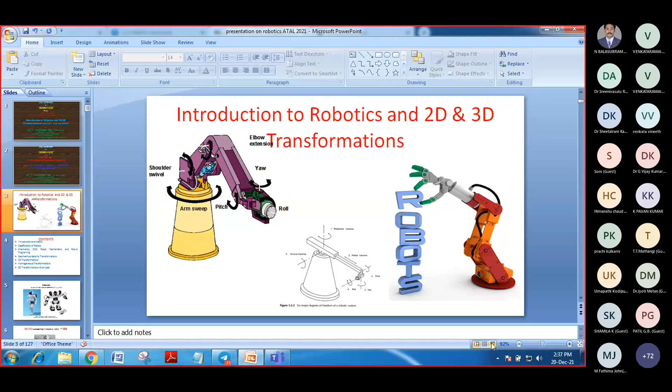My topic will be introduction to robotics and 2D and 3-dimensional transformations. Later I will focus a little on homogeneous transformation also, whatever it may be, 3 matrix or 4 matrix.

Introduction to robotics. This is a simple robot I am displaying here, which is called a simple 3-degree freedom robot. We have in this the shoulder swivel, and the 3 movements: yaw, pitch and roll movements.

This is elbow extension. This is shoulder swivel. This is arm sweep, and this is elbow extension, roll, pitch and roll. This is actually the 6 major degrees of freedom of a robotic system.

We have here rotational traverse. This is the first one, rotational traverse. Second is radial traverse. This movement, and third one is vertical traverse. We have these 3 linear motions, rotational motions, and another to the gripper: rolling, yawing, pitching.

That we will be discussing later, after the introduction. So my contents will be the introduction and history, then the classification of robots. Depending on what we have, different kinds of classifications for Japanese, German, Indian, American - depending on the country, we have different classifications.

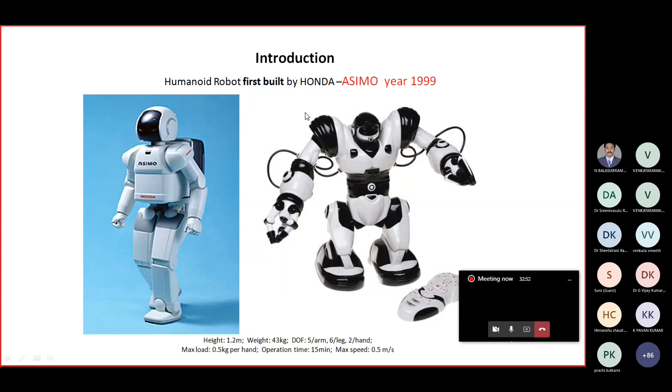The maximum speed can take up to 0.5 meter per second while walking. So this is with the least specification they made in 1999. The name given is ASIMO - ASIMO stands for Advanced Step in Innovative Mobility.

In 1999, it was first launched by Honda Corporation. It has recently celebrated the 22nd birth anniversary. The ASIMO robot made by Honda Corporation celebrated its first on 14/10/99. Now the 22nd birth anniversary was recently celebrated on 14/10/2021. So this is just a brief introduction.

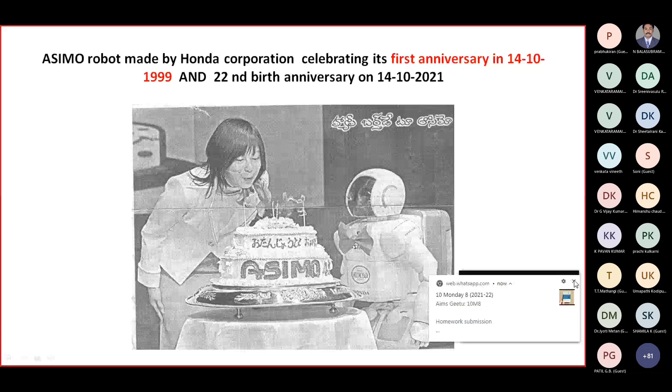Now we can define what is robot - how a manipulator or an industrial robot. You can consider it as an industrial robot or any working mechanical robot, composed of a series of links connected to each other via joints. Each joint usually has an actuator, a motor for example, connected to it, which transfers the energy from one joint to another joint.

A manipulator is composed of a series of links connected to each other via joints. Each joint usually has an actuator connected to it. Robot.

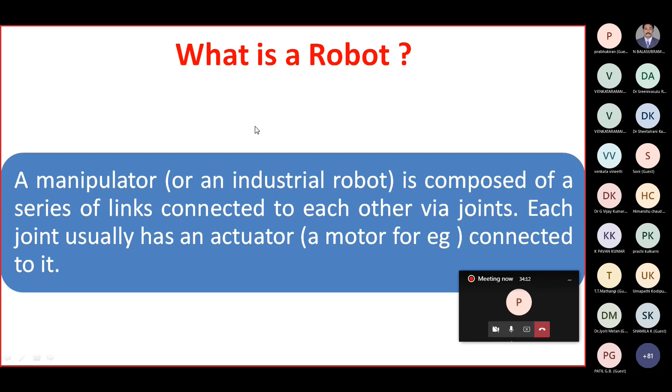Robotics is the art, knowledge base, and know-how of designing, applying, and using robots in human endeavors - how they can develop this kinematics and dynamics, how they can develop the degrees of freedom, how we can calculate the workspace, everything. So that study gives about the robotics.

Robotics is an interdisciplinary subject that benefits from mechanical engineering, electrical and electronics engineering, computer science, biology, and many other disciplines. So robotics is not only considered mechanical, it is concerned with other branches - it is interdisciplinary, you can say. They are about electrical connectivity, electronics, and this. They will be giving computer science - writing some logical programming for the robot - and biology and other many areas also we are using this.

Robot means forced labor, simply a worker. That's why the name was given. A robot is a reprogrammable multifunctional manipulator.

Robotics is a branch of technology which concerns the problems of robot design, development, and applications. In robotics, we study how to design robots, how to develop them with the help of degrees of freedom, and their applications.

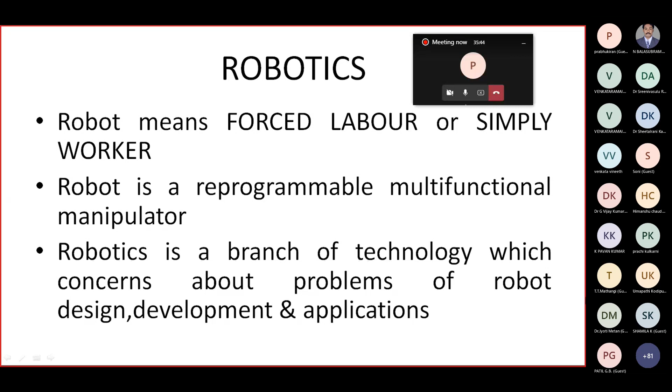Joseph F. Engelberger is known as the father of robotics. He invented the first robot in 1954. That's why we consider him the father of robotics.

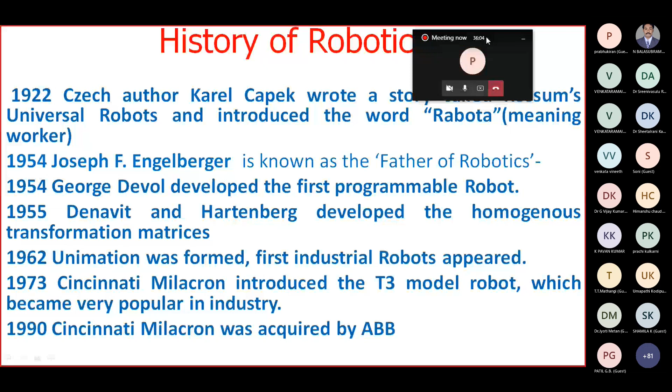Now for the history of robotics: in 1922, the Czech author Karel Čapek wrote a story called Rossum's Universal Robots and introduced the first use of the word robot, meaning worker, as already mentioned, forced labor. In 1954, Joseph Engelberger is known as the father of robotics.

He introduced the actual design and development of robotics, the applications, and how we can analyze robots. In 1954, George Devol developed the first reprogrammable robot using a programmable language.

In 1955, Denavit and Hartenberg developed the homogeneous transformation matrices. That's why we call them the DH transformation matrices, named after Denavit and Hartenberg who developed them.

In 1962, Unimation was formed and the first industrial robot appeared in the world. Later in 1973, Cincinnati Milacron emerged. This company produced not only robots but also CNC machines, milling machines, and turning machines. They introduced the T3 model robot, which became very popular in industry.

At that time there was big competition between CNC machines and robots. They introduced both the CNC and the T3 model robot in 1973. In 1990, Cincinnati Milacron was acquired by ABB, Asea Brown Boveri, which took over the company and developed more robots and transformers.

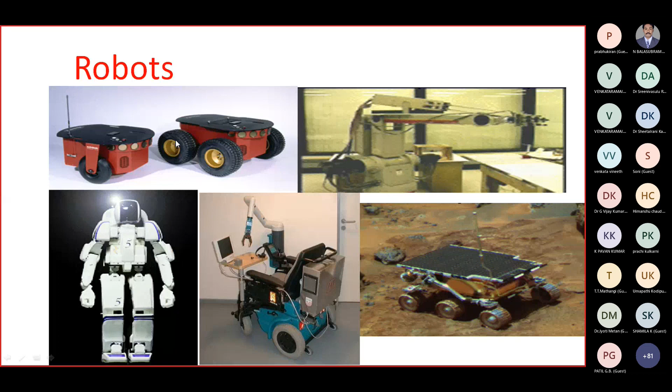There are different kinds of robots: wheeled robots, articulated robots, SCARA robots, and others used in different applications such as space, dental, medical, and military applications, including small robots used on battlefields to counter warships.

A robot is an automatically controlled, reprogrammable, multi-purpose manipulating machine with several reprogrammable axes. This is the short definition. Now we can move to the classification of robots.

The first classification is JIRA, the Japanese Industrial Robot Association. The second is RIA, the Robotics Institute of America. Then AFR stands for Association Française de Robotique, which is the French classification. Another one is SCARA, and Puma is there also.

SCARA stands for Selective Compliance Assembly Robot Arm. The first SCARA was developed by Mitsubishi Corporation, and JIRA was developed by the Japanese Industrial Robot Association. So we have different classifications: JIRA, RIA, AFR, SCARA, and Puma.

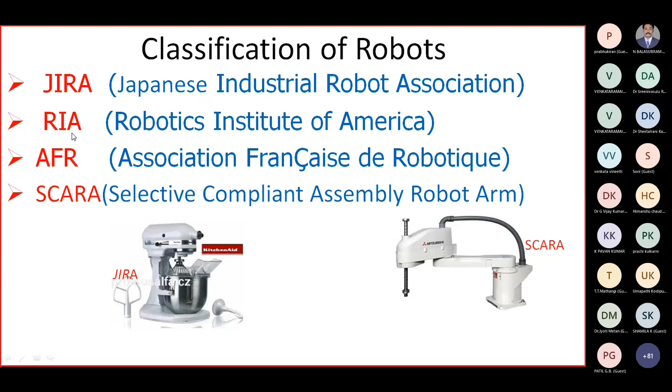Now for the types of robots. First is pick and place, which just moves items between two points, one place to another. These pick and place robots are used for shop floor operations such as mechanical material handling, equipment handling, and part handling systems.

Then a SCARA robot, Selective Compliant Articulated Robot Arm, is a pick and place robot arm with angular XYZ positioning, which we can see used in pick and place operations.

The second type is continuous path control, where it moves along a programmable path based on the program given along the X-axis, Y-axis, and Z-axis. An example is the 6-axis industrial robot developed by the Fanuc company.

But additional cost is often spent for tooling and programming. This is a totally 6-axis industrial robot with 3 joints and 3 links, giving us a total of 6 degrees of freedom. The third one is sensory robots.

Sensory robots employ sensors for feedback systems. The robot performs according to the sensor applications - what sensors we are using: pneumatic, hydraulic, mechanical sensor, or electrical, electronic sensors. Because of that, we can give motion to the particular robot.

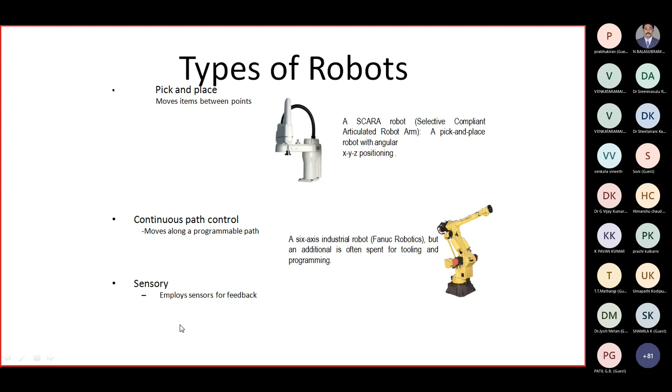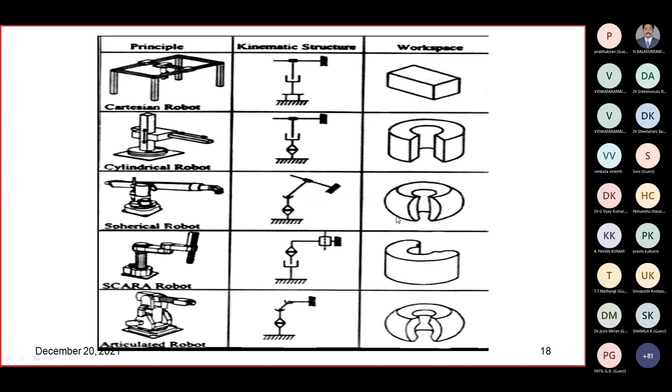Totally it is called 6 major degrees of a robot. Now we can go for some manipulator joints, how we can give translational motion, that is linear motion. One is orthogonal motion, orthogonal joint. Through the linear joint we can give linear motion, and through the orthogonal joint we can give orthogonal motion. Here we denote this translation motion. Linear joint is typed by L, and orthogonal means O, we denote that as O.

This is the input link, this is the output link, and this is the joint motion. We are giving joint motion to this. And for the orthogonal joint, we are giving the joint motion here. This is the input link, and this is the output link.

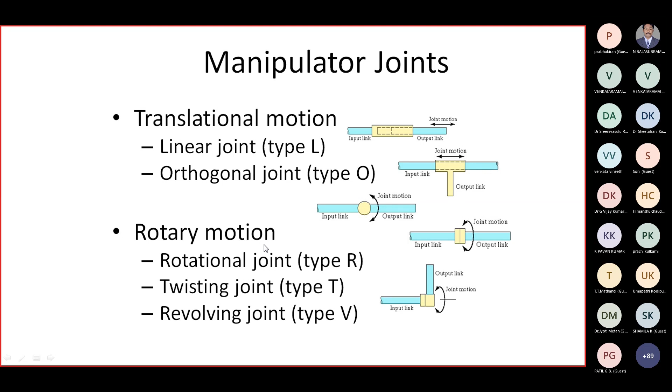Now the joint notation scheme uses the joint symbols L for linear, O for orthogonal, R for rotational, T for twisting, and V for revolving, to designate joint types used to construct a robot manipulator.

Here two terms are there: it separates body and arm assembly from wrist assembly using a colon. For example, TLR means twisting, linear, rotational for body and arm, then twisting, rotational for wrist. The wrist movement will be twisting as well as rotation, whereas the body and arm assembly has twisting, linear and rotational.

Commonly, there are various body and arm configurations. How we can denote this by joint notation, you can see. First one is polar coordinate, body and arm assembly.

This is moving in this direction. This is rotational, this is twisting, and this is the linear movement. So the notation is TRL. T stands for twisting, R is rotational, L is linear. So it consists of a sliding arm.

This is the sliding arm, L joint. This sliding arm is actuated relative to the body, which can rotate about both a vertical axis and a horizontal axis. This is the T joint, and the horizontal axis is R. One vertical axis we consider as Y, and one horizontal axis as X. So there are two rotational movements, T and R, twisting and rotational, and one linear. That's why in polar coordinate we give the notation TRL.

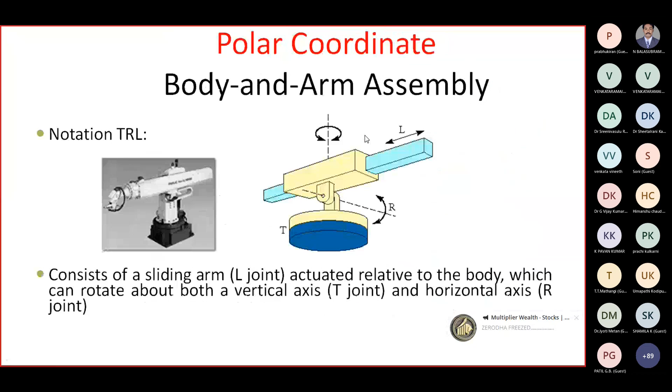Similarly, for Cartesian coordinate, the notation is LOO. You can see this L direction, these two joints are there, these two are orthogonal, one is orthogonal, one is orthogonal, then this is L.

It consists of 3 sliding joints. This is one sliding joint, another sliding joint, and this is the third sliding joint. The 3 sliding joints are there, and 2 of which are orthogonal.

These 2 are orthogonal, and one is linear. So both are orthogonal, meaning other names include rectilinear robot and XYZ robot. This is also called the rectilinear robot. The notation for this Cartesian coordinate is LOO.

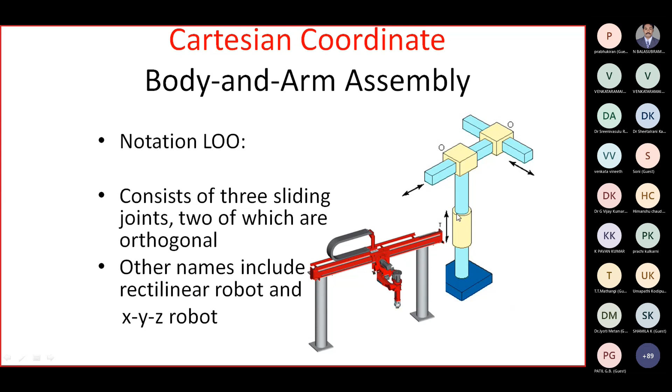So like this, we have four things. Polar coordinate system, that is TRL. Second one is cylindrical, we have TLO. The third one is Cartesian coordinate, LOO. And the jointed arm robot, TRR. Like this, four we have.

And the last one is SCARA. We can see this is the orthogonal movement we are giving, and this is the rotation movement. This is the movement V rotation.

This third one, SCARA, stands for selectively compliant assembly robot arm. Here, similar to jointed arm robot, except the vertical axes are used for the shoulder and elbow joints to be compliant in horizontal direction for vertical insertion task.

Like this we have R, V and O, that is VRO. So now the notation for SCARA is VRO.

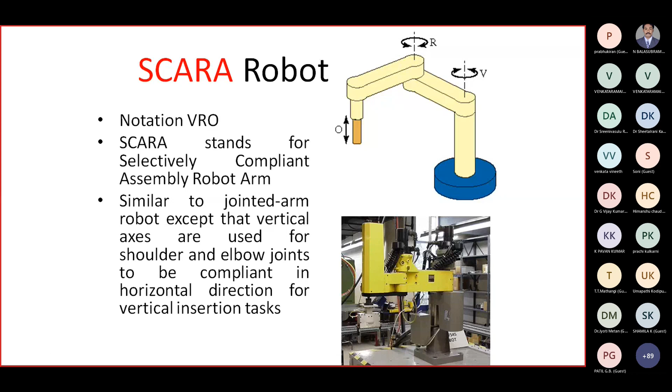Then the wrist configuration. So far we discussed about the body and arm. Now the wrist configuration also we have to see. In the wrist, how we can move the components, how we can rotate the wrist to pick and place the component from one place to another. The wrist assembly is attached to the end of the arm, and the end effector is attached to the wrist assembly. So we are attaching some end effectors to the wrist assembly so that we can pick the components by using the end effectors. The function of the wrist assembly is to orient the end effector.

So body and arm determines the global position of the end effector, then the 2 or 3 degrees of freedom - that is the roll, the pitch, and the yaw. These are the 3 movements, one in this direction, one in this direction, one in this direction. Then these are the RRT - the rotation for the wrist configuration is RRT, that is rotation, rotation, twisting.

Now joint drive systems. We can use some joint drive systems by using electric, hydraulic, and pneumatic applications. So for joint drive systems, we use pneumatic, hydraulic, and electrical systems. Electric uses electric motors to actuate individual joints. This is the preferred drive system for today's robots.

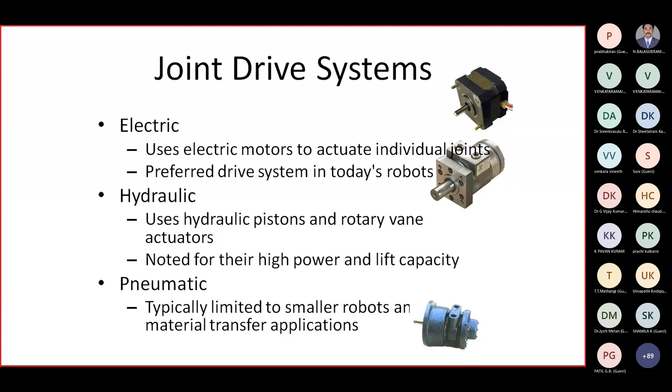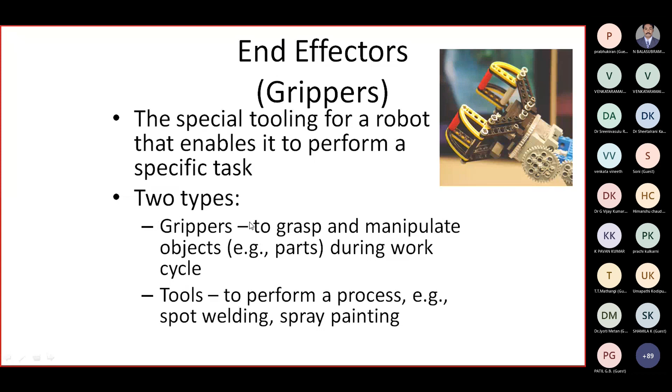by using pneumatic applications. Now the end effectors - you can see these are the grippers. So for the end effectors, we are giving these grippers to hold the component. This is special tooling for a robot that enables it to perform a specific task. Two types: grippers to grasp and manipulate objects during the work cycle, and tools also we use sometimes to perform a process, like spot welding, spray painting, and arc welding. So for this kind of welding purpose, we are using some tools here. So two types of end effectors we can use: grippers as well as tools.

Grippers, you can see grippers and tools. These are the kinds of various tools and grippers we are using for holding the component for the robot and end effectors.

Now the robot control systems. We have limited sequence control, playback with point-to-point control, playback with continuous path control, and the last one is intelligent control.

In limited sequence control, we have pick and place operations using mechanical stops to set positions. The second is playback with point-to-point control, where it records work cycle as a sequence of points, such as X, Y, Z points, then plays back the sequence during program execution, controlling how the points move in X, Y, Z directions.

The next one is playback with continuous path control. In point-to-point control, it moves from X to Y, Y to Z, Z to X. But in continuous path control, we have greater memory capacity and more interpolation capability to execute paths in addition to points. We give the paths also, not just points, specifying how much movement in the x, y, and z directions.

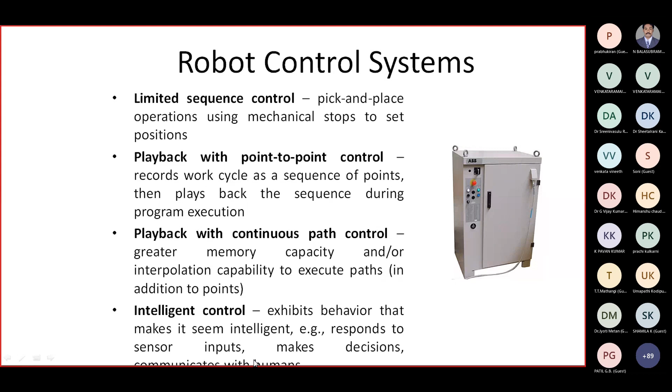Now the next topic is what kind of sensors we are using in robots, such as position sensors, range sensors, velocity sensors, and proximity sensors.

The first is position sensor. It monitors the location of joints, then coordinate information is fed back to the controller. This communication gives the system the capability of locating the end effector, which is the part that usually performs the task. After giving this location to the end effector, it further performs the task.

The range sensor measures the distance between a point on the robot and a point of interest that surrounds the robot. This task is usually performed by television cameras or sonar transmitters and receivers. If the sonar or camera misses a point, undesired coincidences may occur, which is why we sometimes use transmitters and receivers together.

Velocity sensors estimate the speed of a moving manipulator. Due to effects caused by mechanical force, gravity, and weight of load, the workspace load, desired speed, and required force to reach that speed should be computed continuously using these velocity sensors.

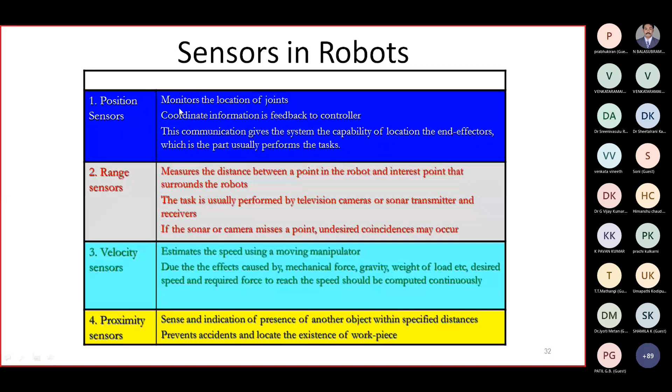The last one is proximity sensors. These sense and indicate the presence of another object within specified distances, which prevents accidents and locates the existence of the workpiece exactly, including the coordinate system on the robot. So these are the sensors in robots: position sensors, range sensors, velocity sensors, and proximity sensors.

Then what are the parts of a robot? There are five main parts: manipulator, pedestal, controller, end effector, and power source. Let's see how this is correlated with the human body.

The manipulator has a simple base and appendages, then the shoulder, the arm, and the grippers. Altogether, this is called the manipulator, meaning it is the full robot, consisting of base, appendages, shoulder, arm, and grippers.

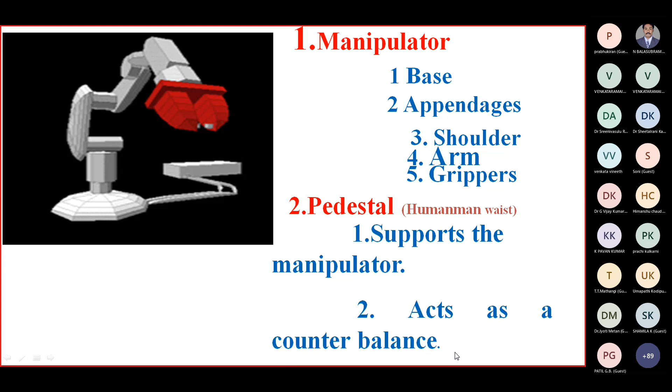Second is the pedestal, which is like the human waist. It supports the manipulator by giving some energy, supporting it and acting as a counterbalance.

The third is the controller, which acts like the brain of the human body. It is comparable to the controller of the robot, issuing instructions to the robot, controlling peripheral devices, and interfacing with both the robot and humans.

The end effector is like the hand. Everything that can be done by a hand can be done by the robot's end effector, such as spray paint attachments and welding attachments, including spot welding and various other welding attachments.

Then vacuum heads, then hands. So these are all the end effectors. The last one is power source, meaning the energy - how it is getting energy, how it is getting power. Similar to how humans get energy from food, the power source gives energy to the robot, which may be electric or pneumatic. So we have the five main things: manipulator, pedestal, controller, end effector, and power source.

Then arm and body motions - what kind of motions can we give to the robot? That is vertical traverse, which is up and down movement of the arm caused by pivoting the entire arm about a horizontal axis or moving the arm along a vertical slide. So we can give these motions.

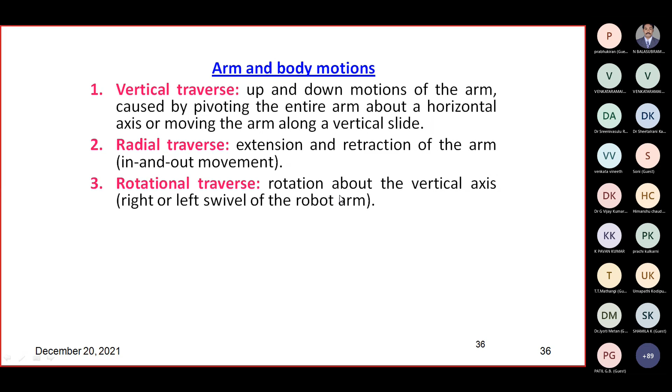And revolving also we can give. The fourth one is revolving, also we can give the rotation.

And the wrist motions - already we know wrist motions: wrist swivel, wrist pitch, and wrist yaw. Swivel means rotation of the wrist. Wrist bend means up and down movement of the wrist, which also involves a rotation movement - this is called pitching movement.

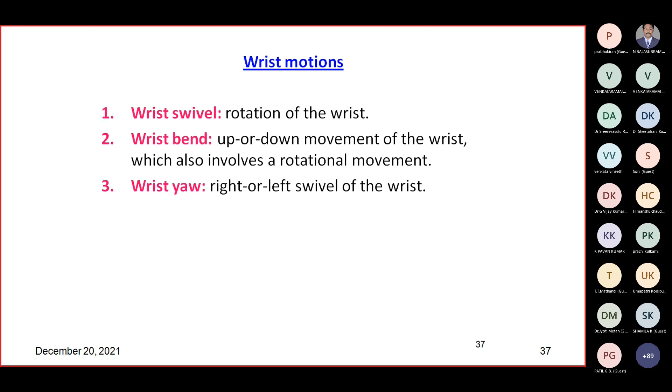Then wrist yaw means right or left swivel of the wrist, that is left and right, that is panning movement - this is called yaw movement of the wrist. So like this, we can give the wrist motion as a technical feature of the robot.

If you want to buy any kind of manufacturing robot with particular specifications, we have to look at all these important technical features mentioned below, starting with work volume.

What do you mean by work volume? Work volume means the movement of the robot in a particular area - that is work volume, work space. Then precision of movement - how precisely it is moving in the X, Y, and Z directions.

Using pneumatic, hydraulic, and electric power energy. Then speed of movement - how fast it is moving, whether low speed, high speed, or intermittent speed. Weight carrying capacity - how much weight the robot can hold. Then type of drive system - whether it is electrical, pneumatic, electronic, or hydraulic.

By looking at all these technical features, we can make a better decision when purchasing a robot. Now let's discuss them one by one.

What is work volume? Work volume refers to the space within which a robot can operate - it may be rectangular space, cylindrical, triangular, or linear. It refers to the space within which the robot can operate.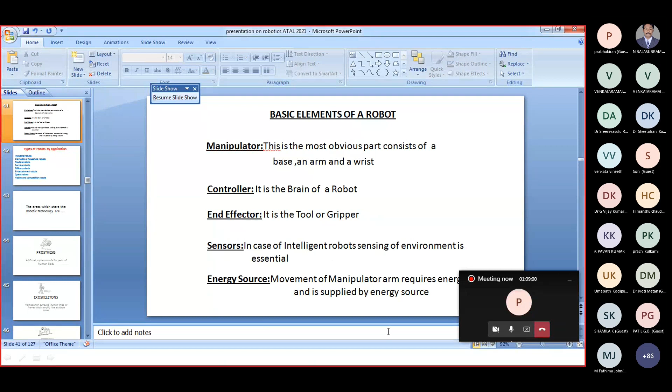In the human hand, the arrangement of bones and joints provides dexterity. Each joint represents degrees of freedom. There are 22 joints here, and thus 22 degrees of freedom in the human hand.

The degrees of freedom will be 22 here. Counting through the joints - first, second, third, up through 22 - we get 22 degrees of freedom for 27 bones.

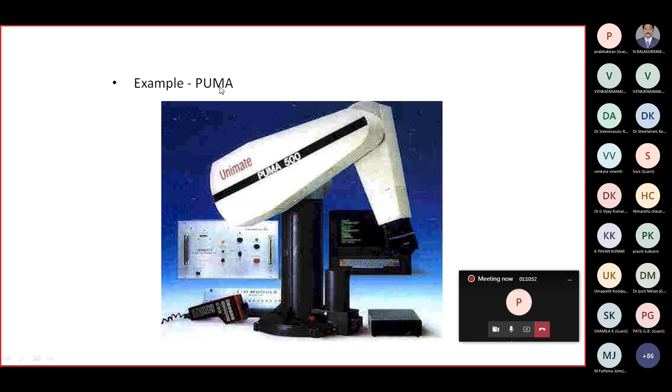This is one kind of robot called Puma - Programmable Universal Machine for Assembly is its name. And examples include the Stanford arm.

Guide robots can be sent into the army battlefield to safeguard the soldiers and army officers.

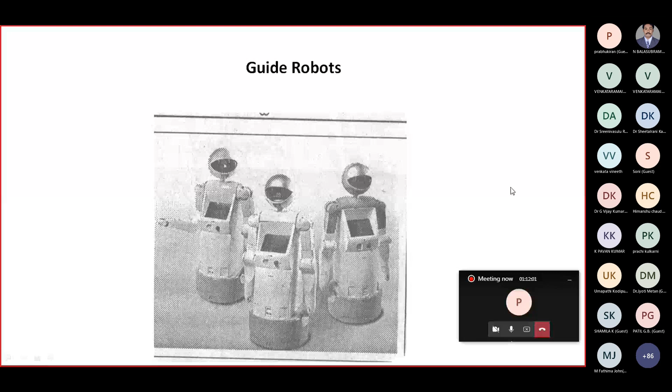So we are sending in the robot in the battlefield to safeguard. Guide robot, these are the robots. We can see some applications.

This Asimo, this is the articulated. This is applications of different manipulators. This is by using all these various applications.

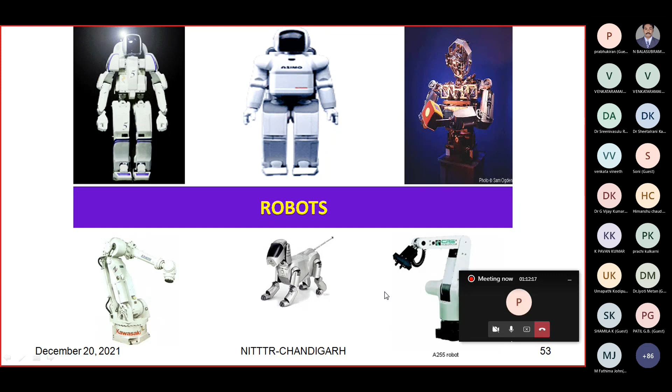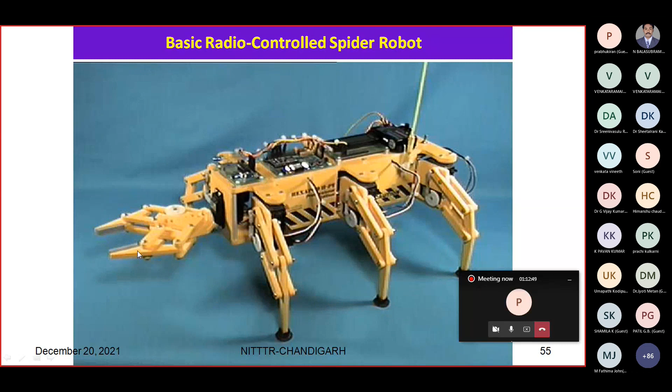Basic radio controlled spider robot - since it has a spider shape, it is called spider robot. We have three legs here and three legs again there. These grippers are used to hold devices, and the spider has a camera, which we keep mounted on it. So this is the six-legged spider robot.

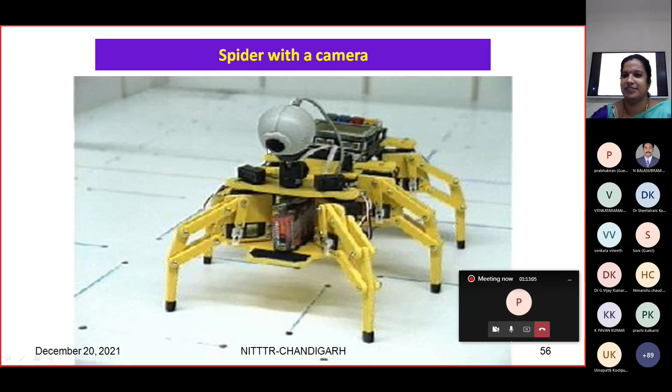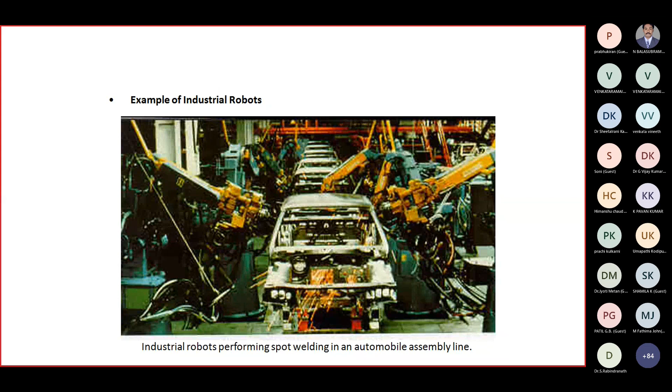That's why humans are being replaced by these robots nowadays, to get high accuracy and high performance of the products. Now we can see this being done in the automobile trim line section, using this kind of robot to perform the task.

Simply, the output of this CMM robot is to generate geometrical points. After getting the geometrical and coordinate points, we can make a model of that component and go for machining. So this is like a reverse engineering process - first generating control points, then modeling through surface modeling and solid modeling, then getting the final product through machining to get a finished product. So we are using some robot type CMM machines also.

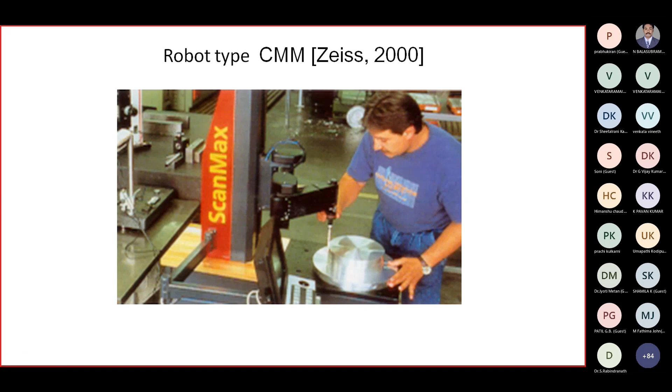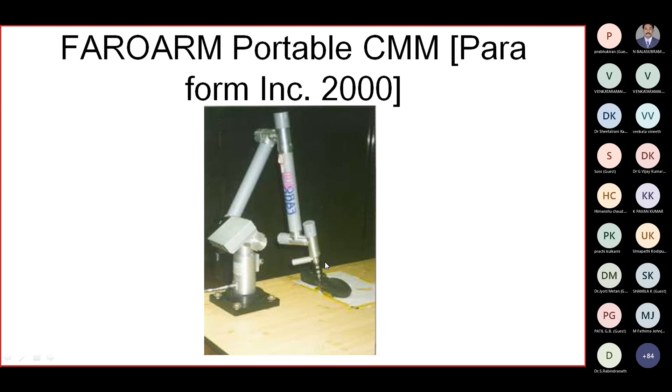Then the Faro arm, a portable CMM - this is a portable Faro arm. These are handy; we can take them to a vendor site. With the help of this portable CMM we can measure the component size, dimensions, everything at the vendor site. These are tiny to handle, small enough to take anywhere on the industry side, any vendor site. With the help of the CMM we can find out the geometry of a particular component. So we also have small portable CMMs.

We also have gantry type robots. Gantry type means very big size robots.

So these are the types of robots by locomotion and kinematics. We can have stationary robots, wheeled robots, and legged robots. So far we discussed the stationary robots and wheeled robots. Now we can discuss the legged robots also, including this slide.

In stationary robots, that includes robotic arms with a global axis of movement, that is Cartesian gantry robots. Cartesian gantry means very big size robots. Those are all used to get the geometry pointers of heavy vehicles, that is automobile vehicles and automobile trucks. We can get the dimensions by using the CMM.

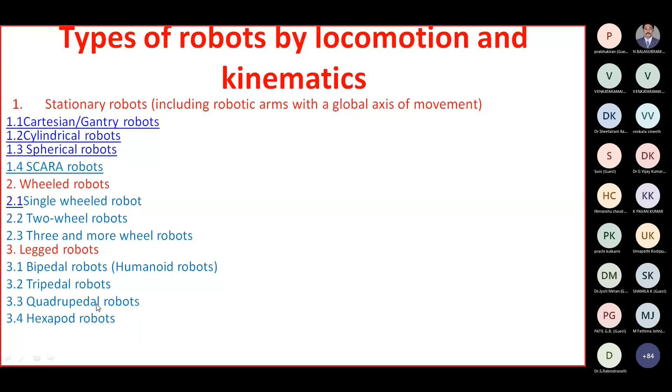So this is a simple structure of 6 major degrees of freedom of a robotic system. There is rotational traverse, vertical traverse, and radial traverse, and other three rotation moments, that is roll, yaw, and pitch. Okay, totally 1, 2, 3, then 4, 5, 6 - totally 6 degrees of freedom.

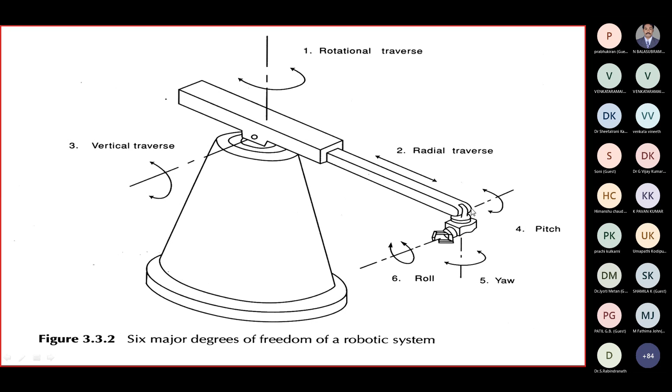Here this is the radial, giving the radial moment, linear moment, whereas these two give rotational and translational moments. Here these three, at least we have pitch, yaw, and roll. Other three things are rolling only.

In the classification, we can see the arm geometry. Depending on the arm geometry, we can consider rectangle. Arm geometry means again your workspace, how this robot can reach maximum area to pick and place the component. That is the rectangular space, cylindrical, spherical jointed arm, then jointed arm horizontal.

Then next comes the degrees of freedom, that is robot arm, robot wrist. We have two kinds: arm and body, and the wrist. So totally we have 6 degrees of freedom. In a simple articulated robot, we have 6 degrees of freedom, that is robot arm and robot wrist.

Power sources, again it is electrical. The power may be electrical energy, may use pneumatic energy and hydraulic energy to operate this robot simply. We have different kinds of power sources.

Then type of motion, that is slew motion, joint interpolation, straight line interpolation, circular interpolation. So slew motion, jointed interpolation motion, straight line interpolation, circular interpolation. Then it gives the path motion only, type of motion, that is point to point.

The next is path control. How we can give the path control, that is limited sequence, point to point, continuous path, controlled path. So four kinds of path control: limited sequence moves up to a limited area only, point to point moves from X to Y, Y to Z, Z to X, continuous path gives linear movement, and controlled path also.

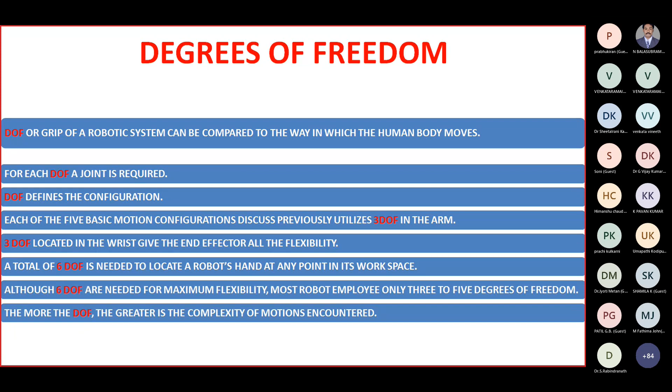So the motion will be, the fabrication time will be taking place. The 3 DOF located in the arm of a robotic system are then rotational traverse, that is the movement of the arm assembly about a rotary axis, such as the left hand, right hand, swivel of the robot's arm about a base.

Then the radial traverse is the extension and retraction of the arm, an in and out motion related to the base motion. The last one is the vertical traverse, which provides the up and down motion of the robotic arm. That is called linear or orthogonal motion.

That's the 3 degrees of freedom located in the wrist, which bear the names of aeronautical terms, that is pitch or bend, then yaw, roll or swivel. The pitch is also called bend and roll is also called swivel. You can see the three different degrees of freedom.

It is the up and down movement of the wrist, like this. Then yaw is the right and left movement of the wrist. Then roll or swivel is the rotation of the hand, moving either clockwise or anti-clockwise direction. So like this, 3 degrees of freedom we can define.

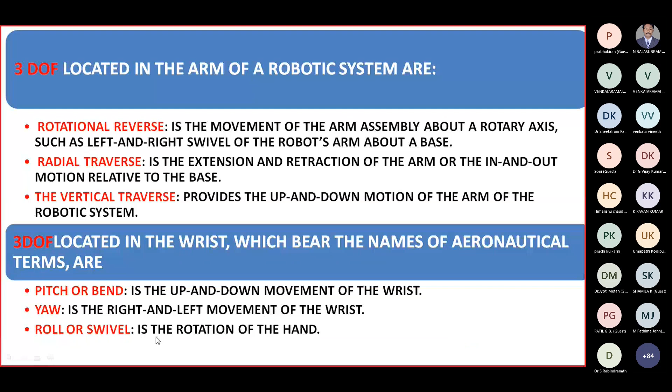So pitch or bend is the up and down movement of the wrist. Then there's the right and left movement of the wrist. Then roll or swivel is the rotation of the hand. Now the robot programming.

Robot programming is typically performed using one of the following methods: online programming, which includes teach pendant and lead through programming. Teach pendant means we have like a remote, similar to how we perform television functions. We have the teach pendant, which controls as a remote and performs the movement of the robot. The lead through program is also there in online programming.

Offline programming, we have different robot programming languages. Then task level programming - what is the task we are giving to the end effector, what is the task we are giving to the manipulator, all these things. These are the programming methods, offline and online.

If you are considering the offline program, it involves writing a program using a text-based robot programming language. This means you have to write in text form, and it does not need access to the robot until its final testing and implementation is required.

In online programming methods, you use the robot to generate the program, teaching and guiding the robot through a sequence of motions that can then be executed repeatedly. Often, programming is a combination of online and offline - online to teach locations in space, and offline to define the task or sequence of operations.

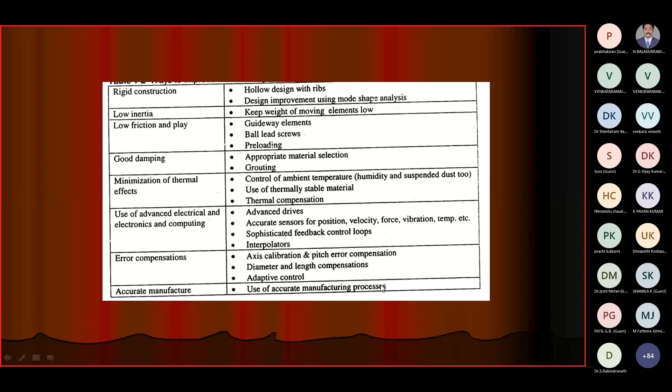How we have the axis formation, how we have different kinds of axis here, and rigid construction - we have low inertia, low friction and play, good damping, minimization of thermal effects, use of advanced electrical and electronics and computing, then error compensation. Here error compensation includes axis calibration and pitch error compensations, diameter and length compensations, adaptive control. Then accurate manufacturing, using accurate manufacturing processes.

Depending on the component dimensions, we can assign the machine, whether a CNC milling machine or CNC turning machine. If it is a flat component, we go for CNC milling. If it is a cylindrical component or workpiece, we go for the CNC lathe machine.

Then we set up the manufacturing database. Setting up the manufacturing database means we have to give the numerical control operations, set of operations, and numerical control sequences, like pocketing, end milling, profiling, knurling, turning, threading, all these things.

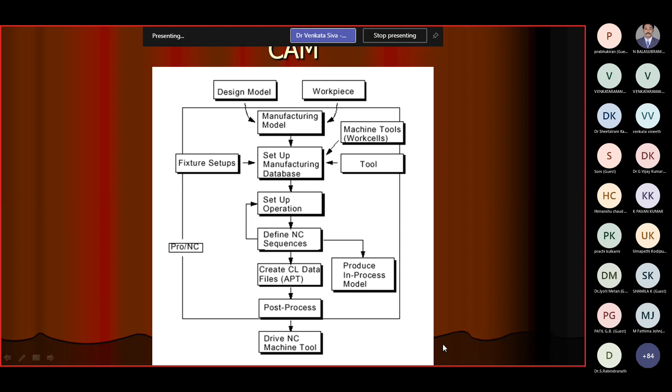Similarly, we can discuss robot machining and how we can view that. Now we can discuss transformations — so far we've covered how we can generate the transformation. Computer graphics and transformations are required for this.

The objective is to convert vector straight lines into raster images to be displayed on the raster terminal, utilizing pixel information. The CRT, cathode ray tube, is the monitor, and we use these images on the raster scan — that's why it's called a raster scan CRT.

Earlier, TVs used CRT tubes, which were very lengthy in size. That's why those TVs were very heavy and the technology was old. Nowadays we have LCD — liquid crystal display — LED, plasma, and OLED.

We have these kinds of screens nowadays to show images on the screen and understand the problems associated with displaying vectorial information on the raster terminal.

Different types of geometric transformations are used during CAD geometry generation and display, along with their evaluation. Then there is the mathematics required to display a 3D image on a 2D screen of the display.

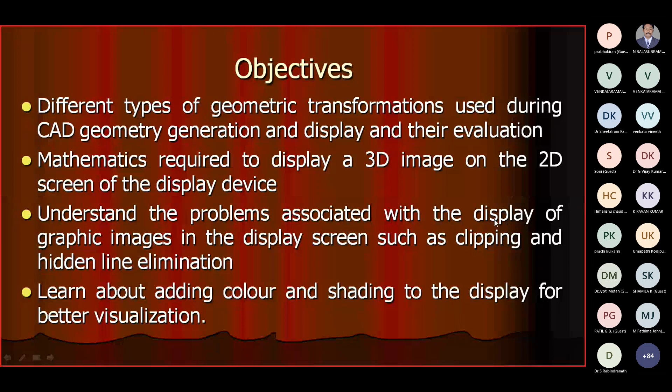The coordinate systems are the right-hand coordinate system, the right-handed cartesian system.

Sudhakar sir, your voice is not coming through. Please kindly unmute, sir. Sudhakar sir? Yeah, now it is okay. Hello, yeah, okay sir, is everything fine? Right, thank you. Just one minute.

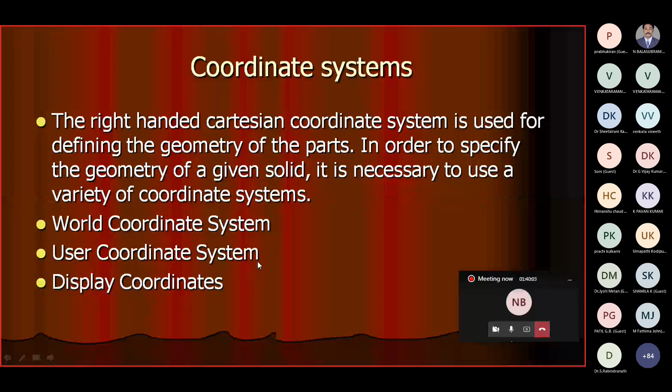These are the coordinate systems we have: world coordinate system, user coordinate system, and display coordinate system, which help for these transformations and all these things.

You can see this is a simple component to be modeled. This is the isometric view of the component, showing how we can represent scaling, translation, and rotation.

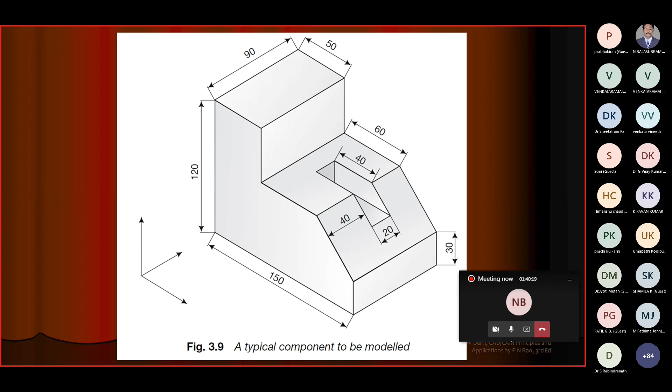World coordinate system refers to the actual coordinate system used as master for the component. Sometimes it may also be called the model coordinate system. Here you can see the typical component associated with the WCS, world coordinate system. It is actually the surface with X, Y, Z levels. Through this system we are generating points at level X, Y, Z, like 000, 001, 003. We are doing all these things.

That is WCS. The second one is user coordinate system. Sometimes it becomes difficult to define certain geometries if they are to be defined from the world coordinate system - sometimes it is not possible with WCS. In that case we use the user coordinate system. An alternate coordinate system can be defined related to the WCS. These are termed user coordinate systems, shortly called UCS, also known as working coordinate systems.

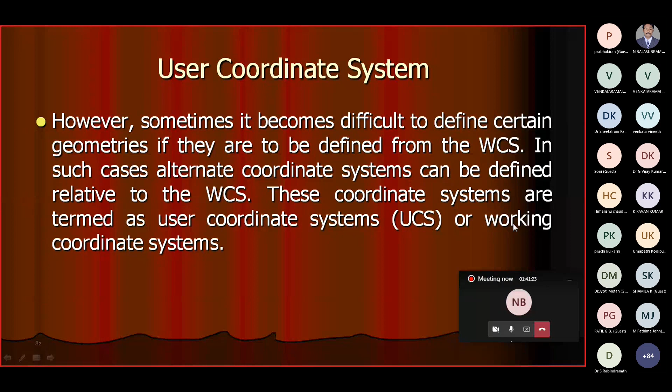Display coordinate system refers to the actual coordinates used for displaying the image on the screen. Here, display coordinates can use WCS as well as UCS.

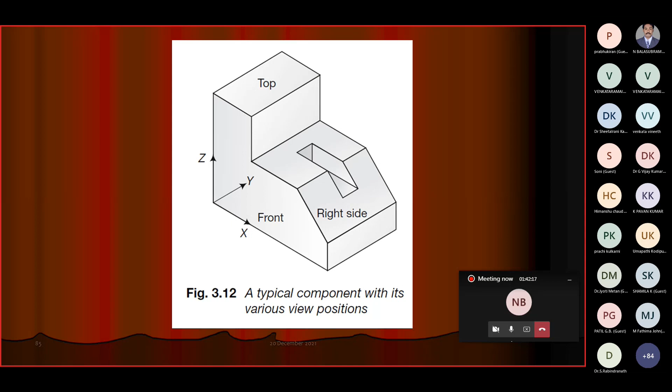You can see here we can represent the typical component with its various view positions. Front position, top position, right side position - this is called the view position system, display positions. You can see the front view, top view, side view, left side view, and right side view, all four views.

The geometric model data - most geometric modelers use a combination of random and sequential form data storage. You can see the data structure of geometric models like this, in isometric projection. We can represent the surfaces, the vertices, and the edges. An edge is defined by two vertices, and with the help of edges we can define the surface. With the help of surface, vertex, and edge we can define the total solid. So all together, we can define a solid.

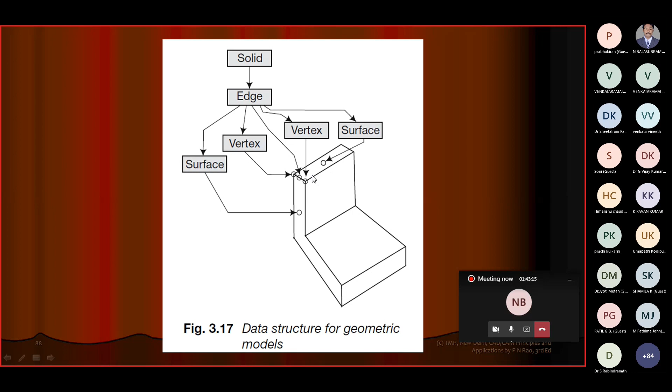The complete data structure for geometric models of products are vertices, edges, faces. Then you can generate a solid body, then single parts. If you want to go for the assembly, you can assemble all the single parts using attributes - that is intersection, union, and subtraction. Like in Boolean operations, we use subtraction, addition, intersection for assembly. By using commands like insert, mate, align, orient, we can assemble these components and finally develop a product. So this is the total data structure when generating from scratch.

This data structure helps with the transformations. Now we can see the transformations - scaling a triangle. The transformations are scaling, rotational, translational, and concatenated transformations.

If we see the scaling of a triangle, the first point is A, 4,0 - it is having 4 units in x direction and 0 in y direction. The second point B is having 1 unit in x direction and 2 units in y direction. The last point C is having 3 units in x direction and 5 units in y direction. Suppose I want to double the scaling of this triangle, what will be my new coordinates? We have 1,2; 4,0; 3,5. If I multiply these by 2, I get a new point, 2,4.

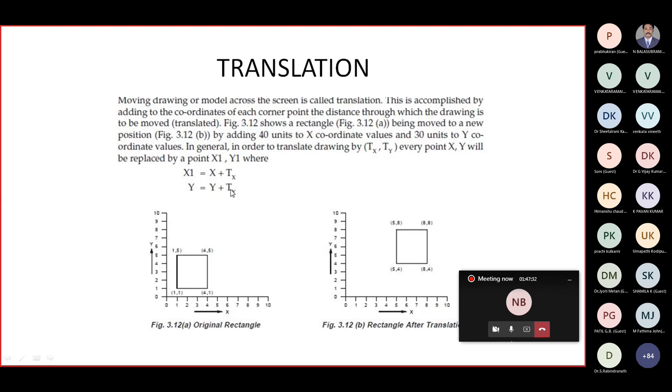So this is the rectangle after translation in x and y direction - in x direction I am moving 40 units, in y direction 30 units. The equations for translation are: x1 equals x plus tx, y1 equals y plus ty. tx means the translation in the x direction, and ty means the translation in the y direction. So this is about the translation.

Next is rotation. The rotation matrix is cos theta, sin theta, minus sin theta, cos theta. This is the 2 by 2 matrix.

Suppose I want to rotate about 45 degrees. Theta is 45. I am giving the displacement point 40, 20, meaning in x direction it has 40 units as the initial point, and in y direction it has 20 units. So here it is 4, here it is 2. This first point is P1. After rotation about 45 degrees, what will be my new point? That is P1 to P2, the new point. So here in x direction I have 40, in y direction I have 20.

If theta equals 45 degrees, I replace theta with 45 degrees: cos 45, sin 45, minus sin 45, cos 45. Cos 45 is 0.707, these are all the values. Multiply this by the 40, 20 matrix and you get the new coordinates, 14.14, 42.42. This is the newly generated rotation point. From x direction it is 14.14, and for y direction it is 42.42. So the angle is 45 degrees.

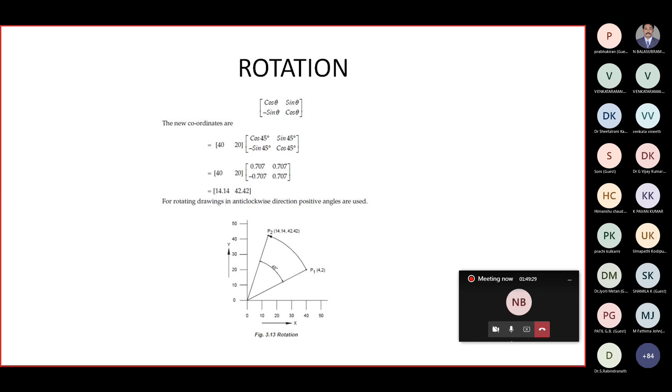You can have scaling, rotation, and translation. Another one is shear. Shear means movement in x direction and y direction.

Similarly, you can take the shearing along the x plane; this is the movement in the y direction, so the shear is along the y direction. The initial points are A, B, C, D, E. This is the original shape along the x-axis and y-axis. Now I want to change the shear along the y-axis, giving new points A1, B1, C1, D1, E1. This is after shear along the y-axis, the y shear. These are the new points.

Suppose I want to shear in the x-axis. My original shape will be A, B, C, D, E, shown with a dotted line. Shearing along the x-axis gives new points A1, B1, C1, D1, E1. This is after x shear. Since it is moving in x direction, it is called x shear; since it is moving in y direction, it is called y shear.

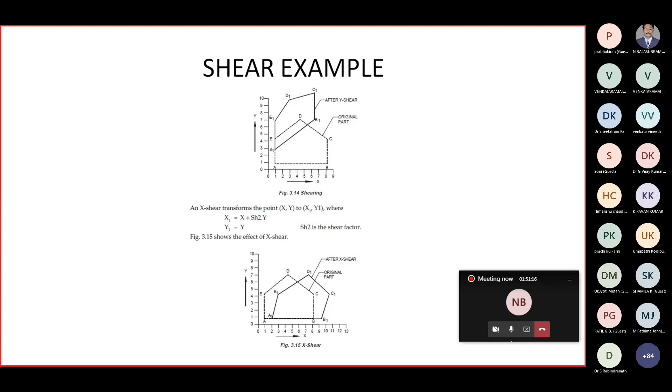So like this, we can give shear movement also for transformations. Transformation means displaying your image on the screen using scaling, rotation, translation, and shearing operations. That's why these transformations are very important in the display lesson.

Now we can see the homogeneous transformations. There are three homogeneous transformations. First, the translation case: x1, y1, 1 are the new coordinates, derived from xy1. The 3 by 3 matrix for translation is: 1 0 0, 0 1 0, tx ty 1 — meaning translation in x direction and translation in y direction. This is the full matrix for the homogeneous transformation for translation.

Similarly, for rotation, we have x1, y1, 1 from xy1, using the matrix cos theta, sin theta, minus sin theta, cos theta, with the remaining entries 0, 0, 0, 0, 1. This is the rotation matrix for the rotation axis. Similarly, for scaling: xy1 transforms using sx 0 0, 0 sy 0, 0 0 1.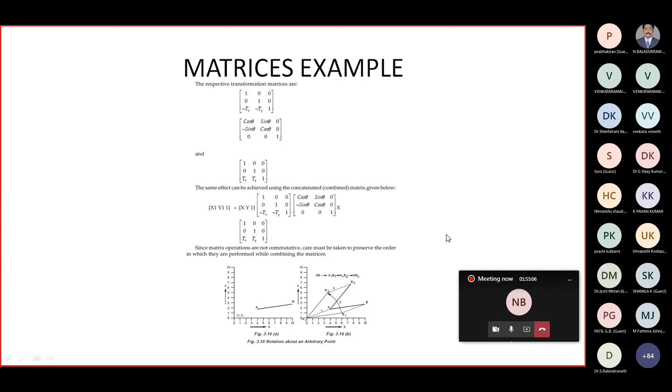So you can see here the AB value is there. I am having 4, and Y we have 3. This is the value. And before concatenated, after concatenated I have this one - that is, this is moving from this direction to this, this 0 2, and before this one - that is called the concatenated matrix. Here it is taking place: translation, rotational, scaling, all these things.

Now, after homogeneous transformation, we can discuss the 3D transformation. In homogeneous transformation, we have the 3 by 3 matrix, whereas in the 3D transformation, we have the 4 by 4. One axis will be extra here - that is 0 0 1 0, 0 0 1 will be extra here. It is often necessary to display the object in 3D on the graphic screen using the transformations. The transform matrix developed for 2D matrices can be extended to 3D here.

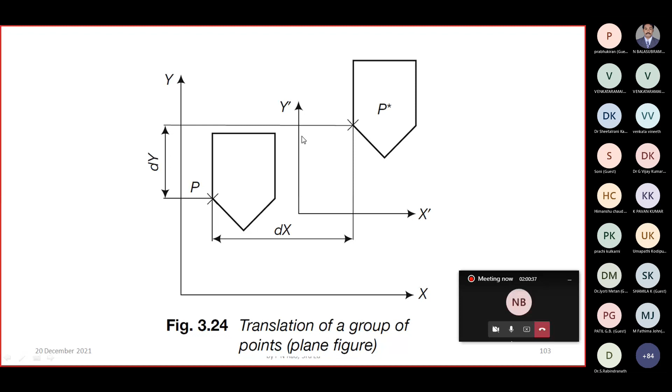You can see the translation of a group of points, a plane. You can see the initial point will be like this. After moving in the dx direction, I am just shifting to this one, P star. For this point, this is the x, this is the y. For this point, the x and y will be x dash, y dash. So dx is the movement about distance, plane figure.

sx, xy. Now scaling of a plane figure, you can see this is the initial figure, I'm having P point, about sx distance, about sy distance. Now I am moving this about sx distance, sy distance. The new scaling element will be like this. This is the doubled scaling of a plane figure, double scaling you can say.

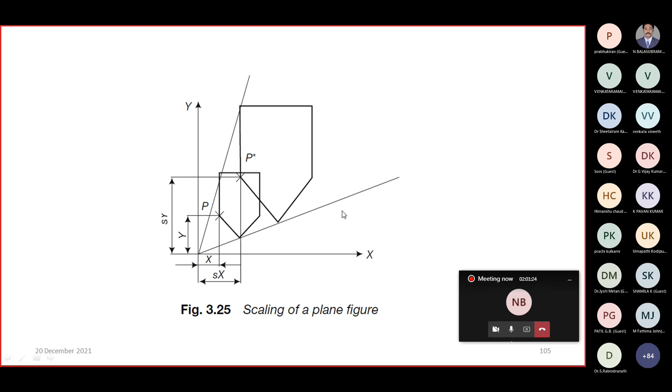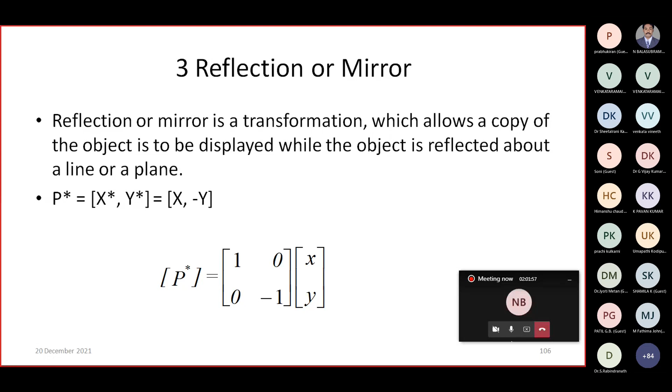Then the third one is reflection or mirror. Reflection or mirror is a transformation which allows a copy of the object to be displayed while the object is reflected about a line or a plane. Here you can see P, 1 0 0 minus 1, x and y. So here the reflection matrix is 1 0 0 minus 1, and x. Suppose if you want to reflect along the x axis, give the same values about x; about the y axis give the value about y. So this is the notational representation of the reflection matrix.

An example of reflection transformation you can see. This is the initial element in the y direction. Suppose I want to reflect in this direction, that will be minus y. So this will be my reflected point.

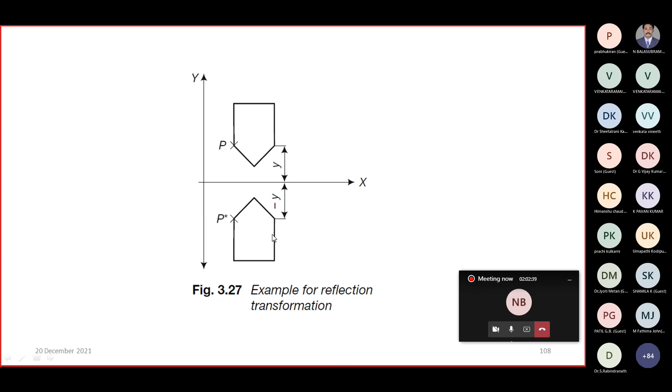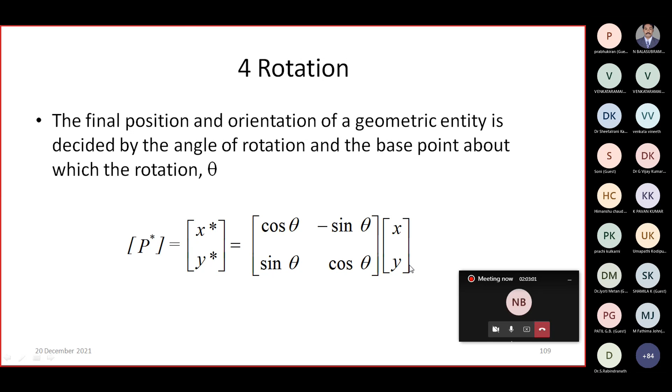Last one is rotation. Rotation is the final position and orientation of a geometry entity decided with the angle of rotation and the base point about which the rotation theta occurs. X, y, that is cos theta, minus sin theta, sin theta, cos theta, and the direction which rotation you want, that is y direction. This is the matrix representation for the rotational transformation.

This is some example if you want to solve, but since we don't have the time, we'll skip solving this one.

Concatenation of matrices is a multiple transformation, that is Tn, Tn minus 1, Tn minus 2, T3 translation, T2, T1 like this. If you multiply all the matrices, you will get the concatenation of transformation. The concatenation is the product of scaling, translation, rotation, and shearing.

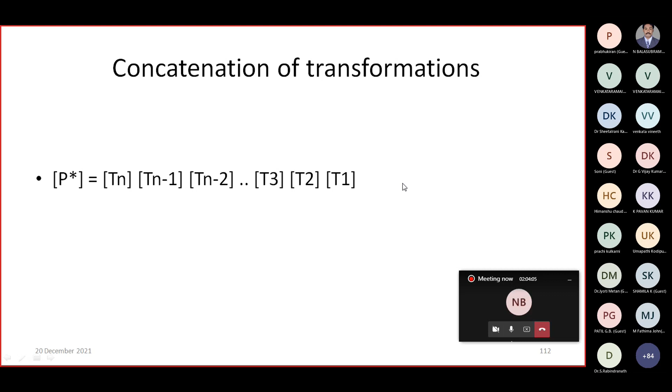Rotation about an arbitrary point: translate the point P to O, the origin of the axis system, rotate the object by a given angle, then translate the point back to its position. You can see you are getting this point. According to this problem we can get a final point. This is the point we are getting, and after an example of reflection about this axis we are getting this point.

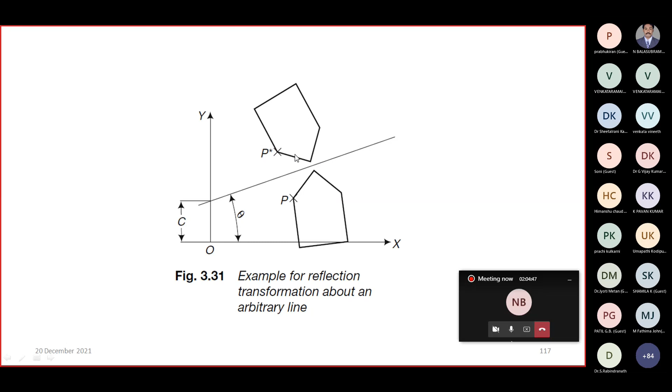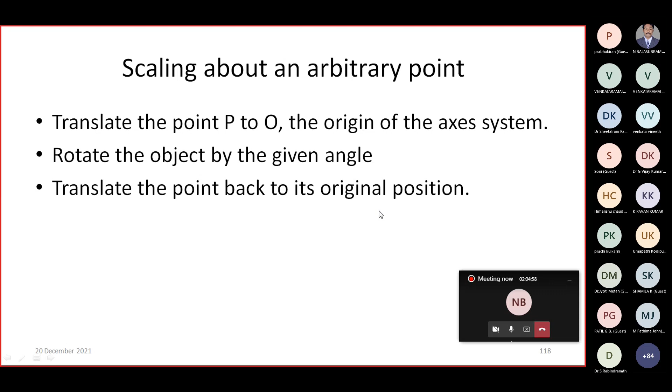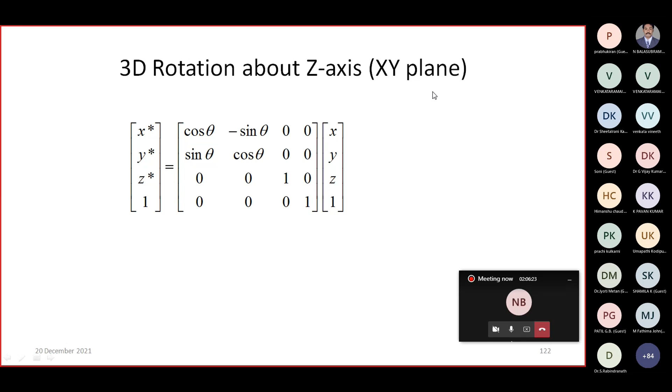3D rotation about the z-axis: z-axis is this one, x will be there, y will be there, cos theta minus sin theta, sin theta cos theta, and this axis will be z, that is about the xy plane. Suppose if I want to go for the y-axis, I'll keep the values of y here, and x-axis I'll keep the value of x-axis here. XY plane, xz plane, and yz plane - like these three planes we have.

You know the mathematics of projections, that is orthographic projection, isometric projection will normally be there. The process and principle of projection will be like this drawing, where we can represent the object; these are the projector, projecting lines we can represent. First angle or third angle projections we are using for the principle of projections. These are the figures.

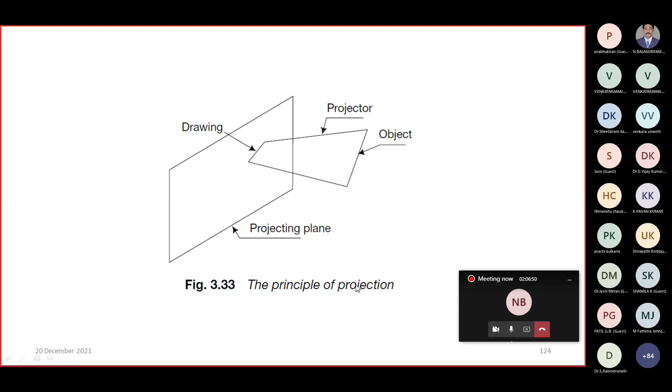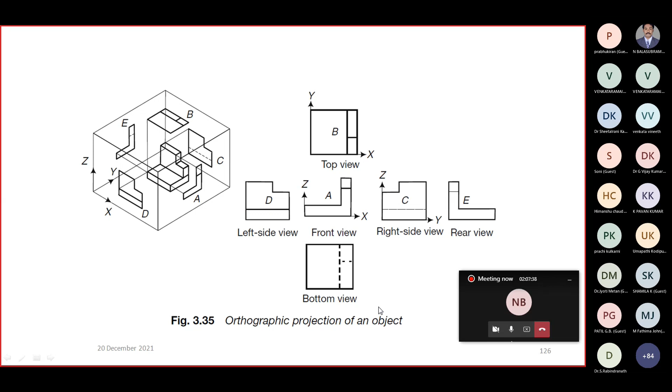You can see this is the front view. If you are representing from this side, this is your front view. Top view will be this, and bottom view, right side view, left side view, and this is the rear view. So all 6 views we can be representing. This is how you are representing through the transformations.